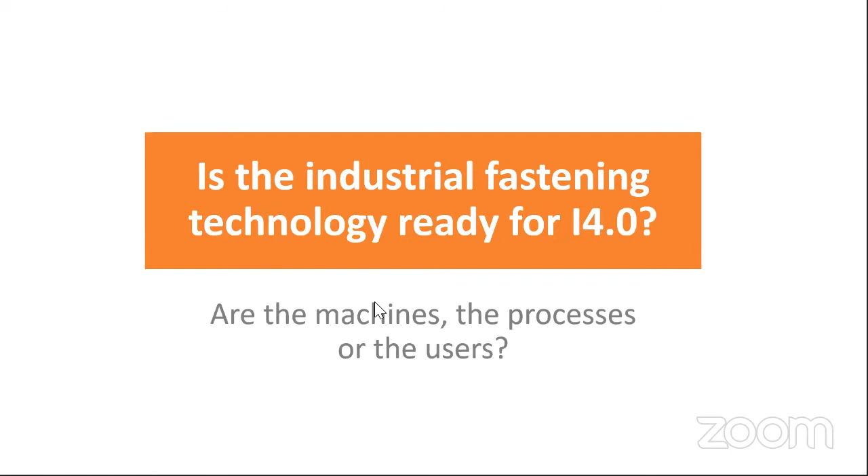I would like to start by asking you a question, and I would like you to take a few seconds to answer it for yourself. Is the industrial fastening technology ready for Industry 4.0? Because what I learned in the past and today as well, is that many people have many different views on Industry 4.0 and also on industrial fastening technique, and what belongs to that and what's not. There is also the question of, are the machines ready for the challenge or the opportunities? Are the processes in place? And are the users ready to go along and really leverage the possibilities here? I would like to answer that question and give you my view on that point.

By using a specific area of Industry 4.0, the expert systems, and tightening technology, depending on who you ask. There are people who really consider that in tightening technology, Industry 4.0 is already there. They use words like artificial intelligence. They don't even need expert systems anymore. Calculating joints is no issue at all. Machines can do that. The design is more or less automated, and also process control and so on. That depends, of course, on who wants to sell you which software, I have to say, or on which specific area those people are working.

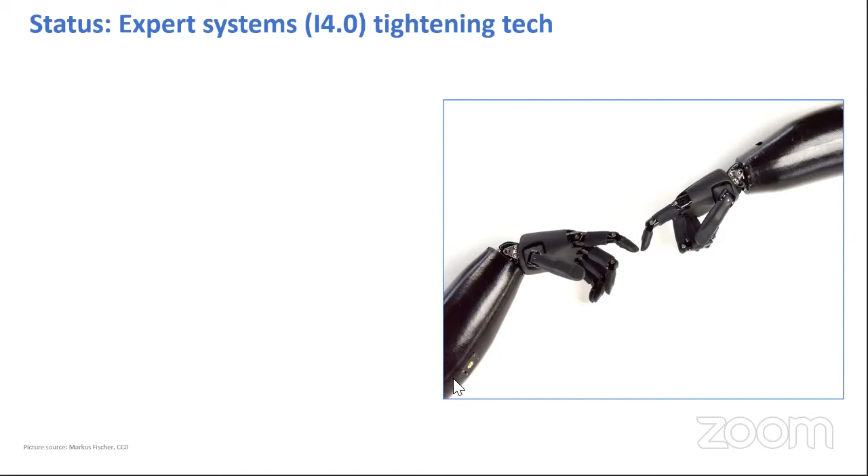On the other hand, you have a lot of people who have a good gut feeling still, and they see that tightening technology has been there for more than 2,000 years. We did it this way in the last 100 years, and we will do it like that in the next 200 years, and there is no issue.

There are challenges as well, and I think there's room for improvement there. I think we are very much in the middle. The current status is, depending where you're working and in which company, somewhere in between. And this in between is pretty a big void.

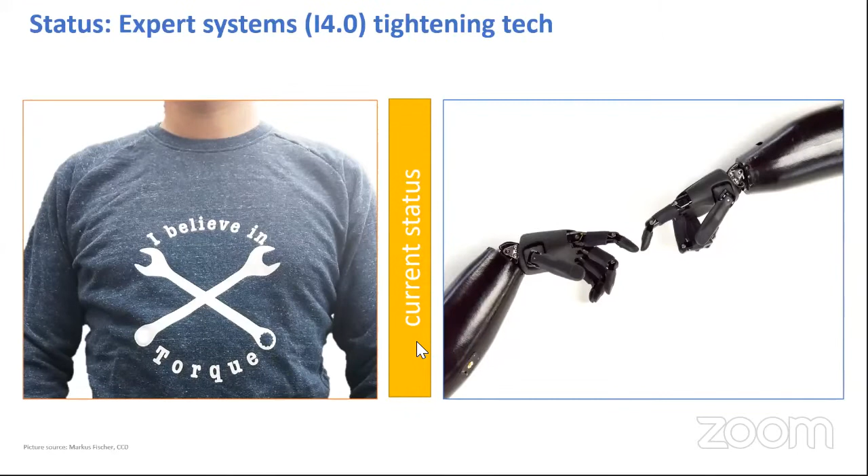I would like to give you an overview on the tightening technology by using a graph, which is pretty suitable from my perspective. The graph is a product safety pyramid. It starts from the minimum requirement, the product safety, which is globally and everywhere the same. This is a minimum requirement. And in the end, the green top, the proof, is of course necessary to show our customers and lawyers and so on that we did everything right.

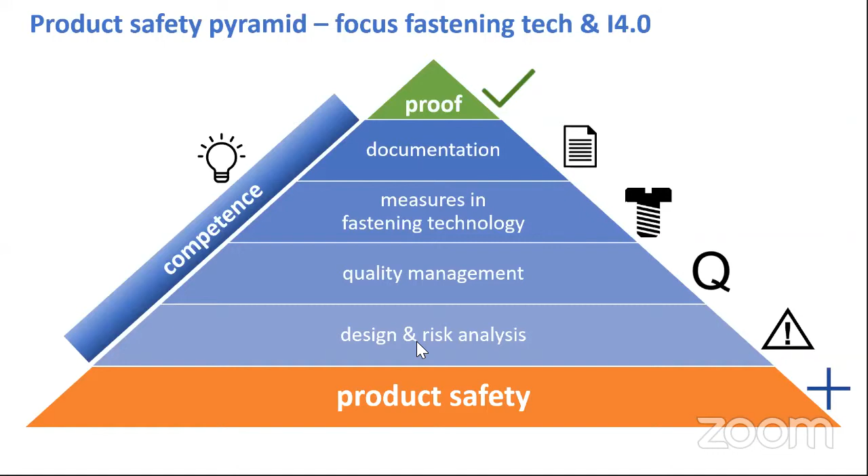But of course, in the middle, we need to maintain also the costs. We need to make sure that we are still capable to perform in a global market, and we need to make sure that our processes are getting streamlined and we are able to join our parts together. So this is where I want to guide you through and show the things in between, how it works with the VDI and also how Industry 4.0 is working out there.

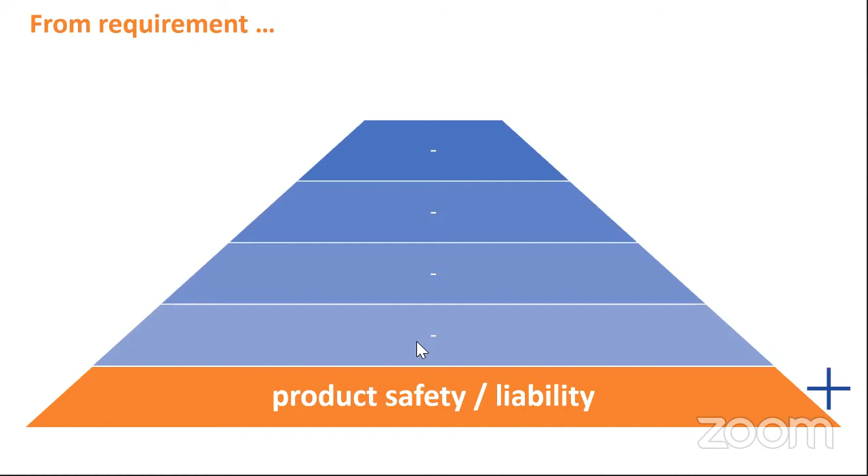As I said, product liability and safety is the basis of everything, no doubt about that. And we need the proof on top of that. And if we think about VDI standards, and that's something I get a lot if I have a webinar lately in Japan or in the United States, everybody is asking me, who cares about VDI in my country? I would say nobody.

But I beg to differ and disagree here, because there are several reasons why you should care about the VDI, because it's provenly best practice, especially with respect to fastening technology and the processes around that. And customers, of course, require allegiance with the VDI standards. And that's not only true for the OEM sector and the big automotive companies. The reason for that is not that they don't have too much money to spend, or they don't worry, but they know that from a technological point of view and from the economic point of view, the VDI standards are just best practice.

Another big point is that the VDI standards, since they are pretty much up to date, and we do a lot of revisions every year on several standards, it's a strong indicator for state of the art and science. And this is with respect to the product liability law, of course, very important. So if something bad happens and you are in the court of justice, everybody will check on the given standards. And since VDI standards are translated not just only in English, but several standards are also available in Mandarin and several other important languages, everybody can expect that you are up to date with those standards as well.

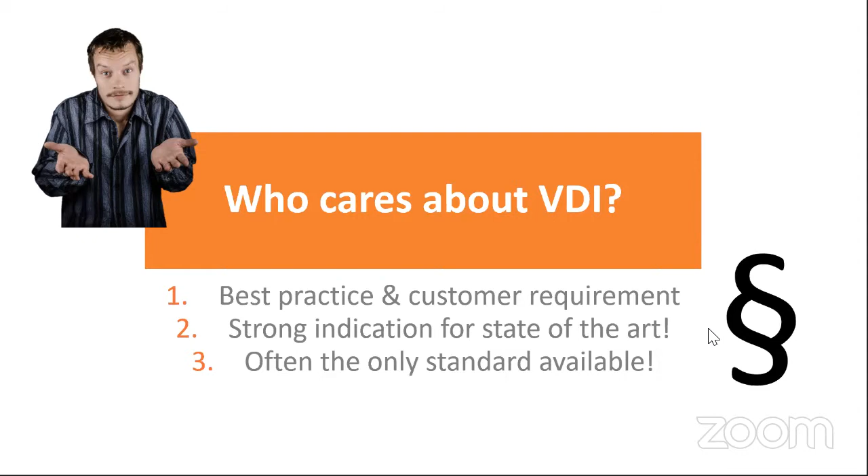And last but not least, and this I will show you in the next slides as well, sometimes the VDI is the only source to tackle challenges in your industry with respect to tightening technology. There is nothing else available. And therefore, you sometimes just have no choice but to cope with what the VDI is giving you. And the good thing about this is that everybody, private person and company, can join the VDI and help to make the standards better.

So to start with, there is a very well-renowned standard in the world from the VDI. That's the 2230-3 and 2230-1. It's a calculation of joints. It's just one screw you can calculate there. It's a 180-page document, and it's been in the market for several decades right now. And before I started to work in that group, they also published a part 2 on the finite element method for joint calculation for multi-bolt joints. And that was also very well received globally to be used as well.

What we learned in that time is that there is a great gap between the theoretical approach of many designers, bolt designers and engineers on the one hand, who are doing the calculations on how much torque you need to get the specific preload on your joint.

And the people who have to do it in real life, in their assembly line, and the people who are planning those assembly lines. And so we decided to support all of those.

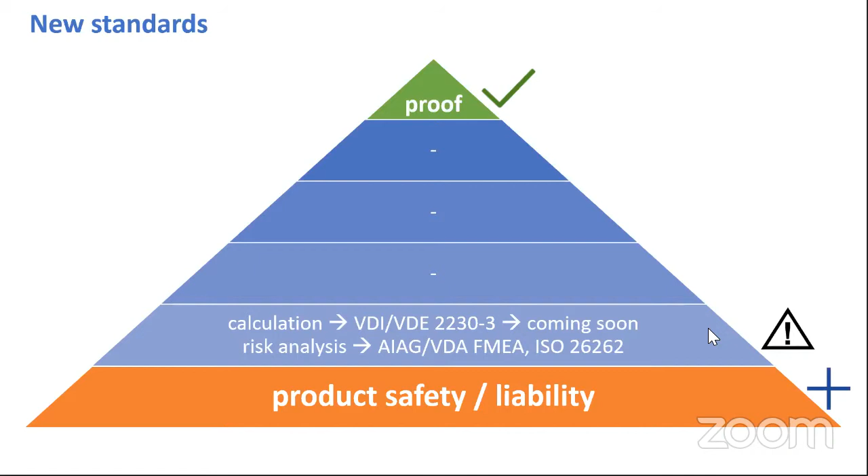And that's something we can see also in quality management. Since 2015, we have ISO 9001 in the current revision, and there you have that focus of risk awareness and how to tackle risks.

So this is, as you can see already, a red line moving upwards, that pyramid. And in addition, in 2016, the IATF followed through from the 9001.

And since I work a lot with companies which are in the phase of qualification for the IATF, I train a lot of those people as well, and also the auditors.

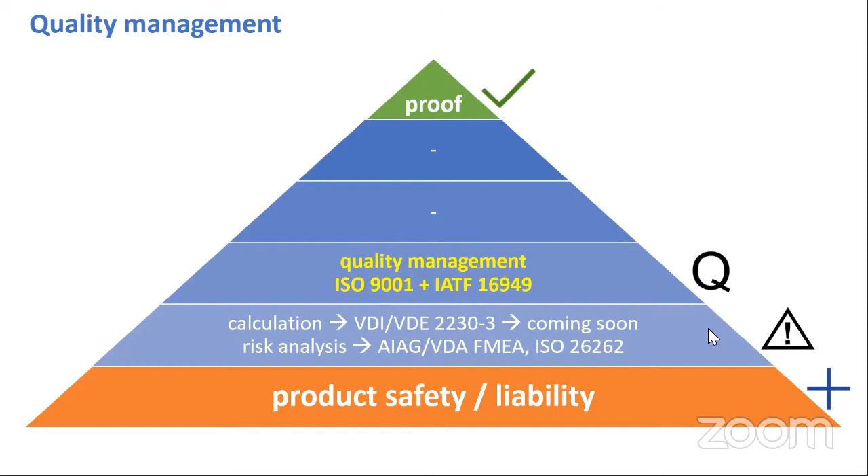And when I got the 2016 version in my hands, I was amazed how much you can transform into tightening technology, and how big the impact was on the tightening technology. And I would like to show you a little example of that.

Just some aspects from the IATF. So if you just choose some of the headlines from the IATF, there is almost everywhere a direct link to solve that issue or to tackle the requirements of the IATF with a VDI standard.

So sometimes you really have to work hard to find a solution with respect to fastening tech if you don't know that the VDI already did that for you. You don't have to reinvent the wheel, you just have to follow the stuff from the VDI.

I'm saying just, I'm a standards nerd. So I have friends still in the normal world, but I of course like standards.

But I can promise you, if you get into those standards and you discuss it with your colleagues or with experts, you learn that there is a lot to gain if you follow up on them and interpret it for yourself.

I would like to make that point on one specific area, error proofing. And error proofing on the basis of IATF can be done in fastening tech with the VDI VDE 2862-1.

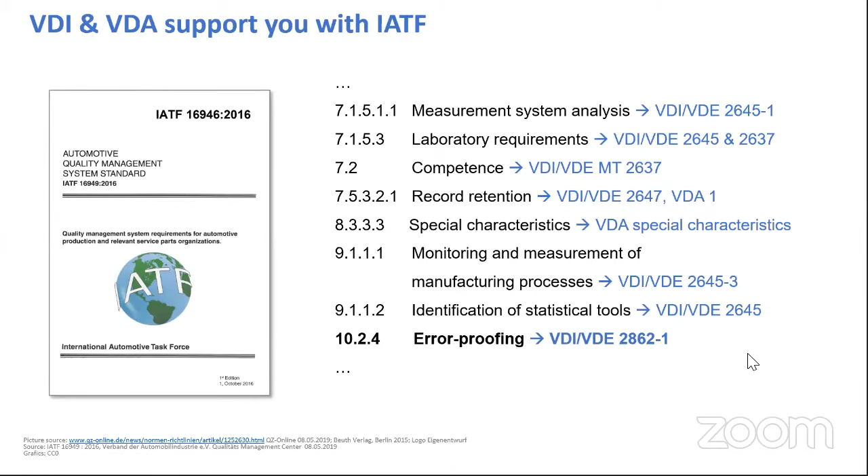That guideline is also very well known, because you might have heard, if you work for a German automotive company for example, that there is a categorization on the joints called A, B, C. A is for safety critical, B is for functional critical, and C is for uncritical joints.

So if you have done your risk analysis at the bottom of the pyramid, then you know where your products and your joints are safety critical.

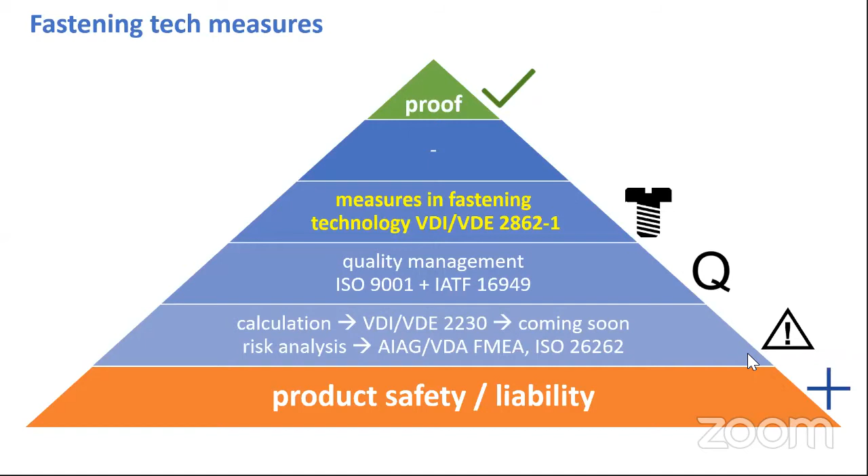In order to maintain safety and to ensure in an economic way that you can assemble those and have documentation in place, you can and should use 2862-1, because that standard helps you with respect to the requirements on the capability of machines, the process capability, and also the measurement equipment capability. They point to other VDIs, and they just support you if you have a functionally critical joint, on what your tools have to do and your processes have to look like.

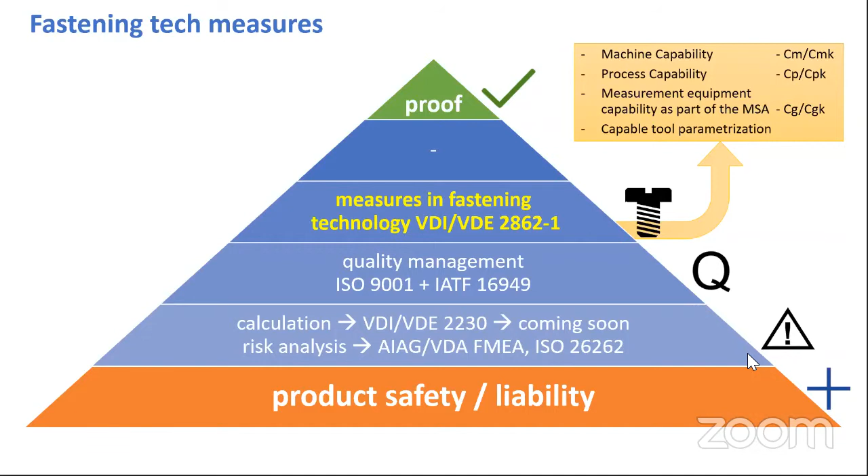And the last point in that line is the capable tool parameterization. I would like to show you what is meant by that, by the capable parameterization of a fastening tool.

You might recognize that from your daily business. If you have a torque angle trace and you want to tighten to a certain torque, then you usually monitor the angle, and that angle should be in a specific window together with a minimum and maximum torque. That's the green box, also called the Niner field.

This is something which is pretty old. It was in the business even before 2012, when the old 2862 highlighted that you need an assembly and a monitoring value.

And what was already there with respect to Industry 4.0 is that you can not just say that's an okay or a not-okay tightening, but you can also give the assembly line and the worker information on where you stopped. For example, if you had gone outside Window 7, and it's clearly a not-okay because the torque trace would be too steep, then you could figure out why this happened and give the worker the possibility to do rework. You could also automatically give the tool the right parameter set to do the repair work with, and give the line the information to put out the product for rework.

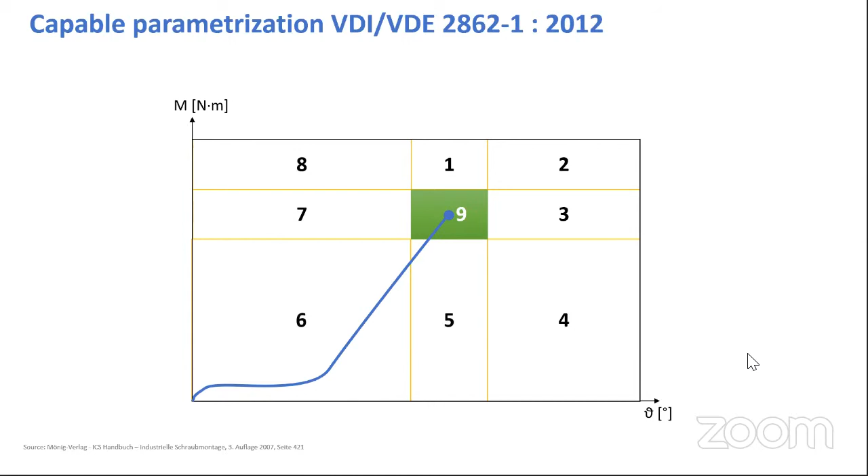So those were the first small steps, but to be honest, nowadays modern tools and systems can do much better. And in 2016, when the IATF came out, there was of course a request for more. Just picking out the error proofing aspect of the IATF.

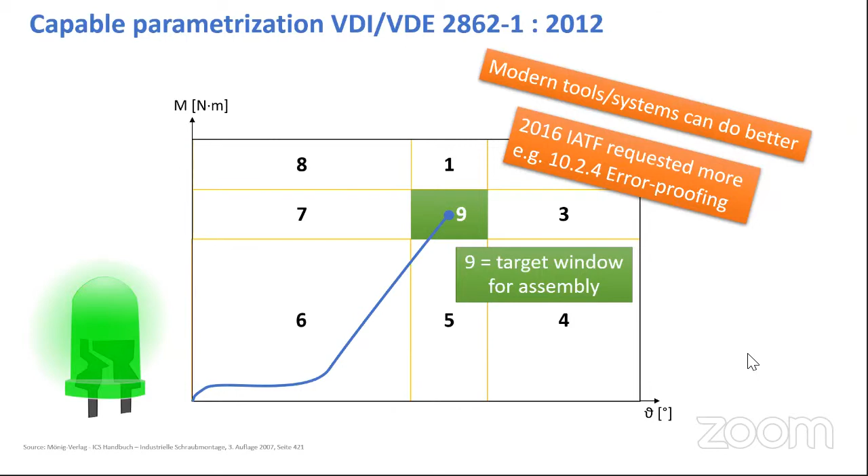If you look at a typical trace of a little bit more sophisticated tightening, for a self-tapping screw for example, you see a torque angle trace like that. And if you look at the little green window there, you see that there is a lot going on just before that. It would be a pity to lose the information we see beforehand.

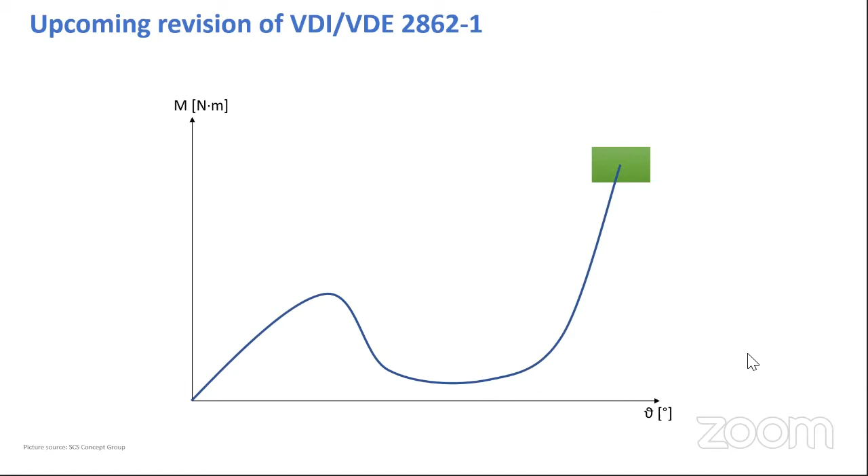To be honest, that green window is not all of it when it comes to ensuring the safety of your tightening. Because if you really cut the thread into your material, that happens way before the green window, and you need to make sure you measured what happens there regarding torque and angle, so you can see that this is okay. So a capable parameterization in the upcoming revision of the standard will mean that you have more monitoring.

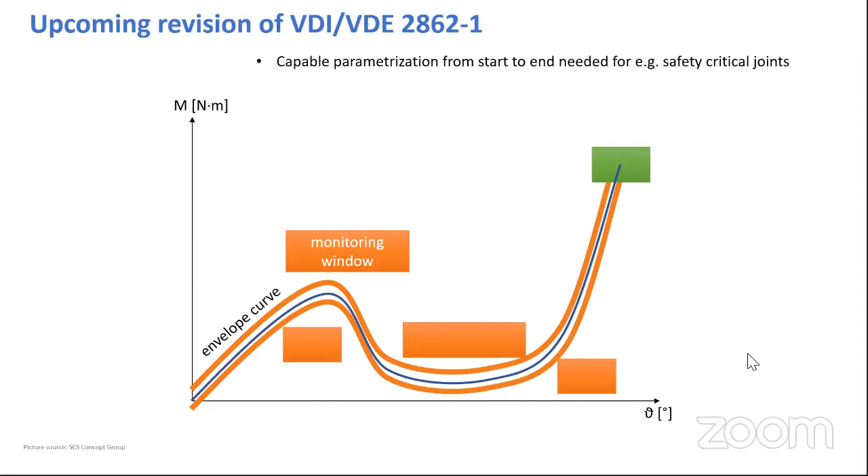Modern versions of that would have an envelope curve. You collect several hundred OK traces and evaluate them so far. So when the tightening is in process, the system is constantly checking against that envelope curve to see if the current trace is still within it, and can report immediately to the worker and stop the tightening before the material or the product is damaged.

This is also very important, but of course you need data analytics for that. And if we really want to use that to find errors during assembly, we need proof that it is really working. This has to be done before you establish that tool in the assembly line.

That means the IATF requires that you, for example, put in some products that are deliberately tampered with, bringing NOK products into the assembly system, and the assembly tool needs to detect them by itself and show a red light or an NOK. This is often not done, or not done to the extent needed. The reason for that is of course that it's a lot of work, but it's still needed.

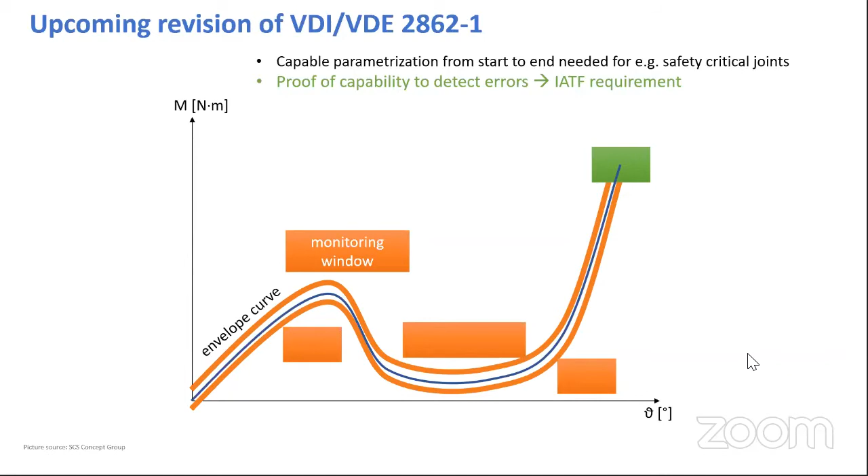Otherwise, you're flying blind. And the good thing is that VDI also supports that effort, requesting what is already required by product liability per se: that you prove your tool is not just okay because the tool manufacturer did a good job and the specifications of the tool are okay.

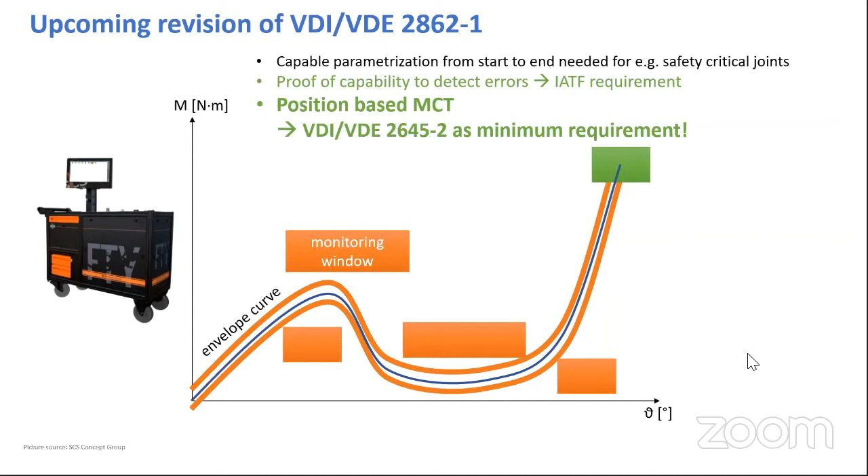But no, as a user of the tool, you have to prove that with your parameterization on your specific joint, you can get the quality you require. Therefore, you need to check the tool with the specific parameterization on the specific joint, and see how much is the scatter and whether the tool is really capable of covering not only torque, but also angle.

Something similar you have with process capability testing. This is also clearly a requirement from a product liability point of view, and from the point of view of VDI 2862, of course.

Process capability testing in tightening technology is pretty special, because in other joining technologies, it's always okay to just check the final product to see if the quality is okay or not. But with bolted joints, there's almost no efficient way to do that in a big assembly plant. You need a decent way to perform that, and this is usually a static torque testing or residual torque testing, described in VDI 2645-3.

But if you want to do that, and I will show you how it's done, you need to ensure you have a capable, parameterized tool before that. You have to have a stable assembly process, and a machine capability proof before you go to the PCT, because process capability testing is really the last line of defense. I would like to show you why that is the case.

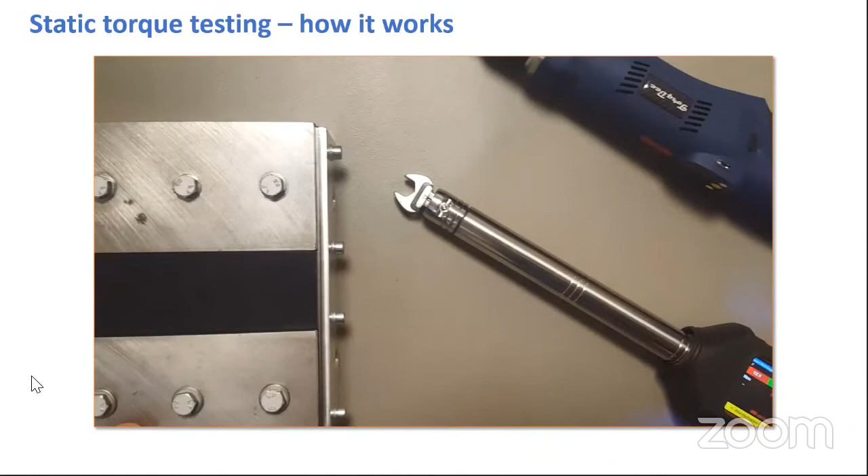A torque angle trace could look like that one. Usually they are a little bit different, but I can show you later. And this is what you get.

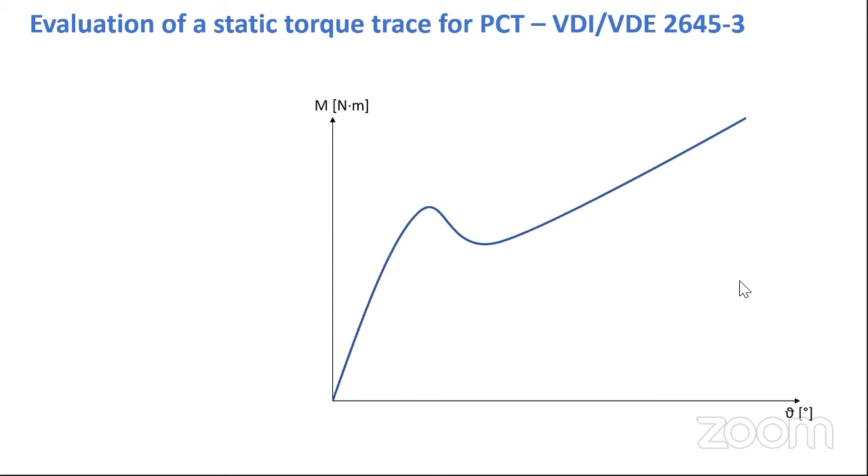The VDI, in that specific standard covering the PCT, says you can evaluate such a trace differently because every joint is different. If you get into that standard, you might get confused, because you can evaluate such a trace in very different ways. It's always a static torque measurement, but the results are drastically different, and this is confusing to people.

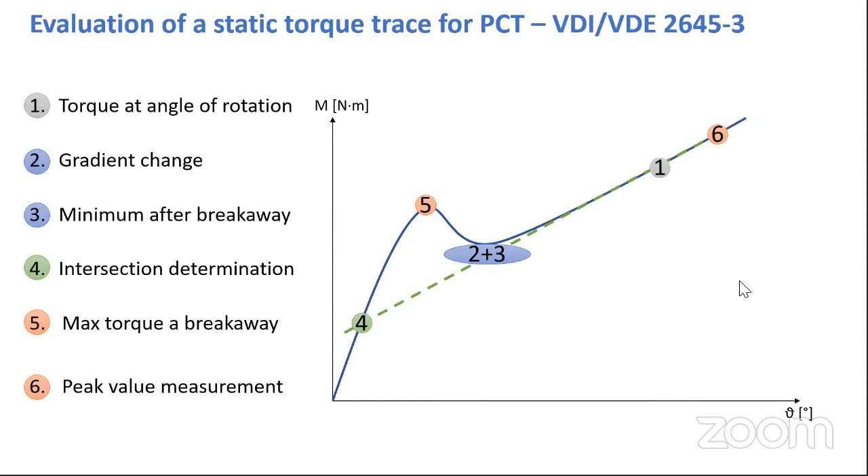If you buy a testing wrench from us or any other supplier in that area, you usually have 6 different methods of evaluation. Depending on which method you use, you can sometimes have plus or minus 20% different torque readings, and that's not easy. So most people are lost in space and don't know which point should be used.

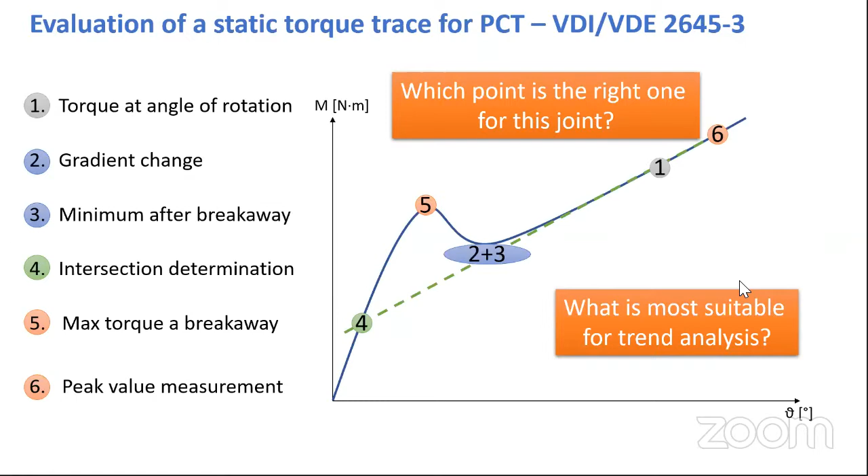That's also because many people don't really get the purpose of PCT in tightening technology. Usually it's just for trend analysis. It's not so much what you would do with joint analytics, where you really want to see the relaxation in the joint. It's about having stable torque readings over weeks, months, years of production, and seeing if something happens there, if readings go up or down. The trend is relevant there, not so much the specific value.

To make this easier for quality assurance personnel, companies in that area came up with some data analytics. For example, somebody took, in an early stage of assembly of a product, 10 or 20 traces of a stable assembled product. The software helps you decide which method gives the most stable result, and where the worker or test personnel has the least influence on the scatter of the result.

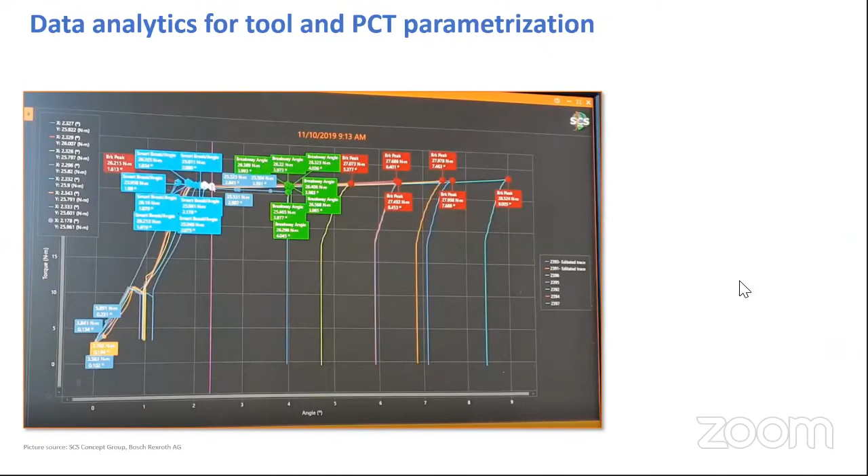Because if you do PCT by hand, you have, of course, some influence from the worker. That's also something where we see that we can compare the tightening data with the PCT data, and help quality assurance personnel decide if the data is valid and can be used, and with which method. Also, the VDI recognizes that in the past, many companies needed to use not just torque angle measuring wrenches, but also fixed angle spindles, which sometimes were even used for production, and then they want to use them as measurement equipment as well.

This is, of course, a big hassle, and IATF per se is not happy if you mix that. Nevertheless, we see, for example, on a marriage station, there's almost no other chance to get the testing done, if not by a specific tool or measurement spindle.

And what we did in the last two years, and I hope we finish our work on that in the next year, is we came up with 2645-1, which contains all the requirements on measurement equipment for machine capability and process capability. We also defined what somebody needs to do in order to use spindles and tightening tools for PCT testing as well. So this is really helping people who felt in the past really in a gray zone with their testing, but thought it was better than nothing. This is really helping them, backing them up and supporting them with real data and standards for that.

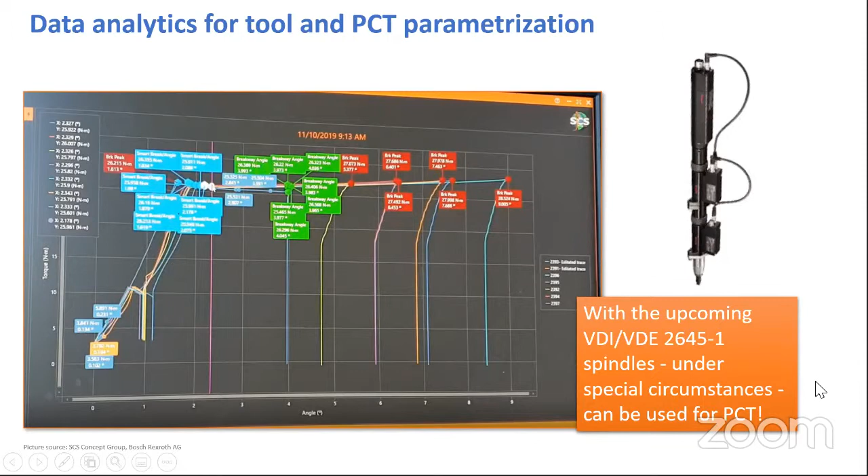If we talk about testing, and if we talk about IATF or ISO 9001, you always need to prove your processes with statistic methods. Usually all those international standards require that you make sure that your processes are correct on basis of ISO 22514. There are several parts of that, of course. And the problem for most people is that there's a big gap between your practical assembly work, your quality assurance with bolts and nuts, and the statistical demands. This is a huge hassle. If you want to follow IATF on the 22514, which is one of the required standards in the back of the IATF, then this is quite a task, to be honest.

So VDI was challenged for that as well. And that's the reason why, if you look at the 2645 series - parts 1, 2, and 3 for machine capability, process capability, and measurement equipment capability - we were able to really take care of those requirements from the ISO and transform them into a practical approach for tightening technology.

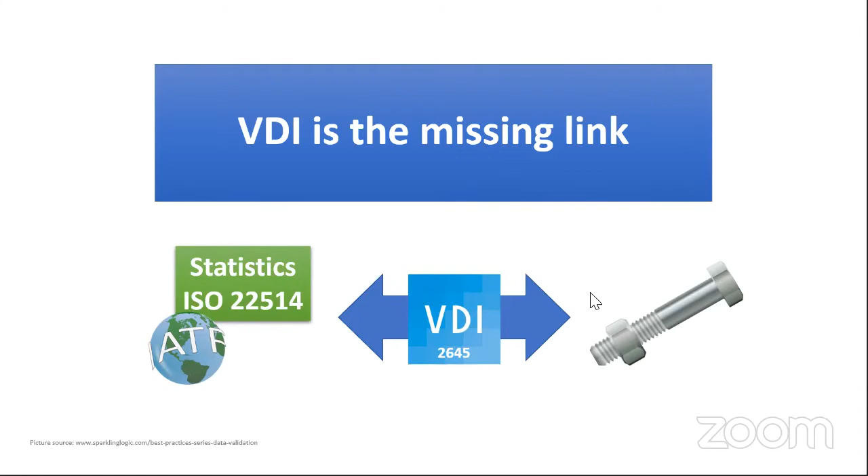And this is often not really precisely defined in a job description. Nevertheless, lawyers would point out that you should know that this is your responsibility as well. So sometimes that's interesting to read and to help the company get better.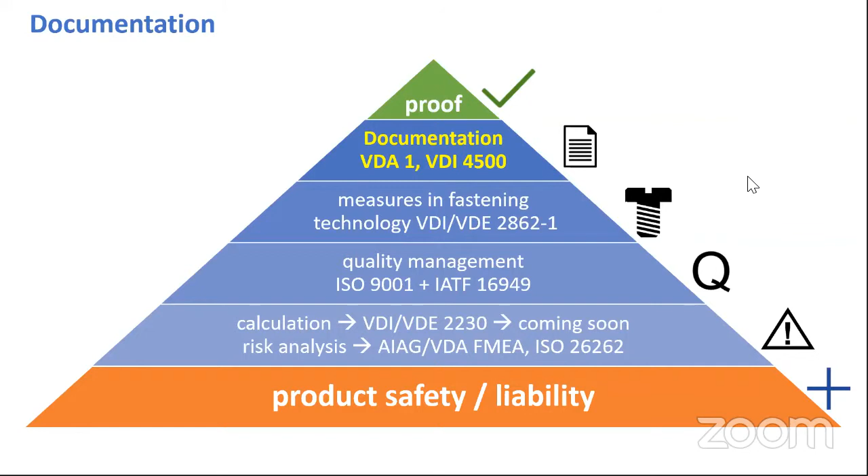Nevertheless, I would like to just highlight the VDA 1 in one perspective, which is quite special. What you can see is on the left side, the 3rd edition, and on the right side, the 4th edition. And if you read the small printed stuff in the beginning of those standards, it's clearly highlighted that even though there is a 4th edition, it doesn't mean the 3rd edition can be tossed away. The reason is that all those editions have a different focus area, so it's important not to forget the old versions and make sure you've covered those as well.

For example, the 3rd edition takes care of software and hardware requirements regarding archives, what is the needed IT infrastructure, and something like that. But the VDA also points towards the 2862 with respect to what needs to be checked, how it has to be documented, how people need to be qualified, and such stuff. And what I found very important in the 4th edition was something like the documentation for machine capability testing, also for our fastening tools, and the process capability testing.

The documentation for machine capability testing, also for our fastening tools, and the process capability testing - the archivation time is 30 years.

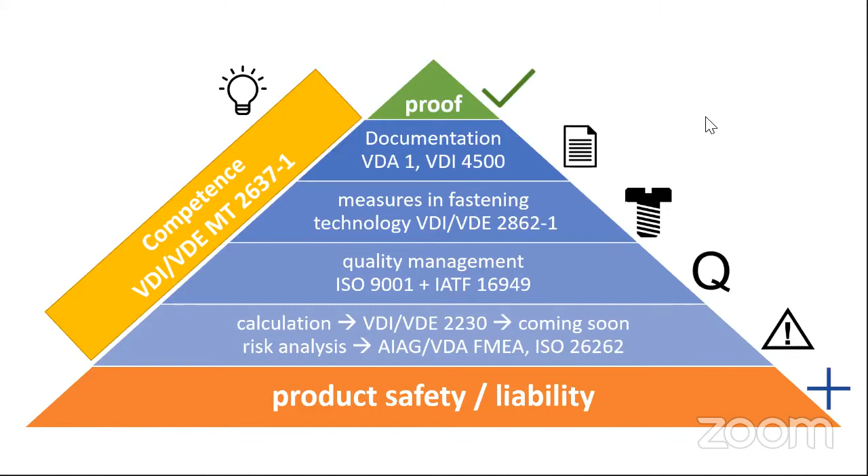So yeah, that's our little pyramid. But we have one thing left to go, and that's competence. Because if you check on product liability, if you look at any of those standards we see here in the pyramid, there's always the requirement that only qualified personnel can be used for the specific tasks.

And that's pretty ominous, or was at least in the past, because there were no standards really helping you on what that means. If you are a welder, then you know if you have a safety critical weld, you need to pass practical and theoretical tests every 6 months or something like that. Otherwise, you are not entitled to do that. The same for people who are calculating welds. And even for gluing, there is a European engineer title for that.

And in the past, there was nothing like that in tightening technology. The German Fastener Association started with a fastener engineer program, where I am now a tutor as well, a lecturer for machine capability and PCT. The possibility to study that has now been there for 7 years, but of course the DSV is not big enough, and it was not structured well enough.

So the DSV and the VDI joined forces, and we were able to bring up that standard, the 2637-1, within less than 2 years. And it's really helping everybody understand what their current job is, what their responsibility is, what they need to know, and how they have to prove it in the end.

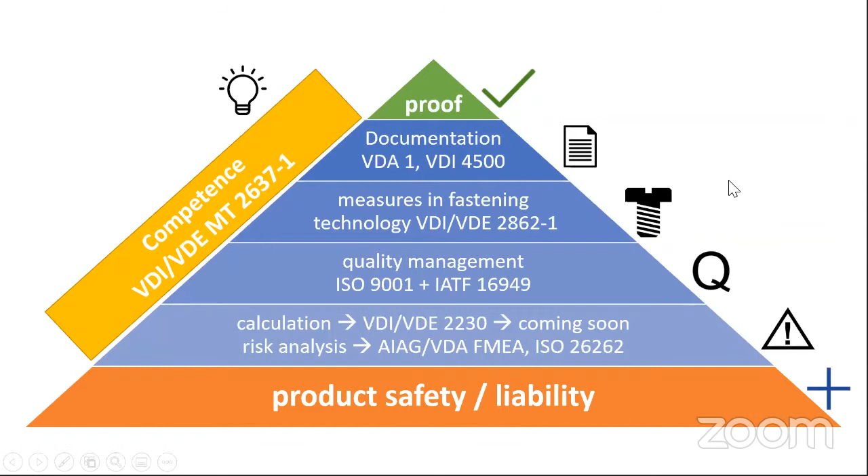This is absolutely a must read for everybody in the tightening business. It's not just for people who parameterize tools, but also for people who buy bolts and nuts, people who buy software even are mentioned there, and also, of course, management, and what they have to prove as competence in that field of expertise.

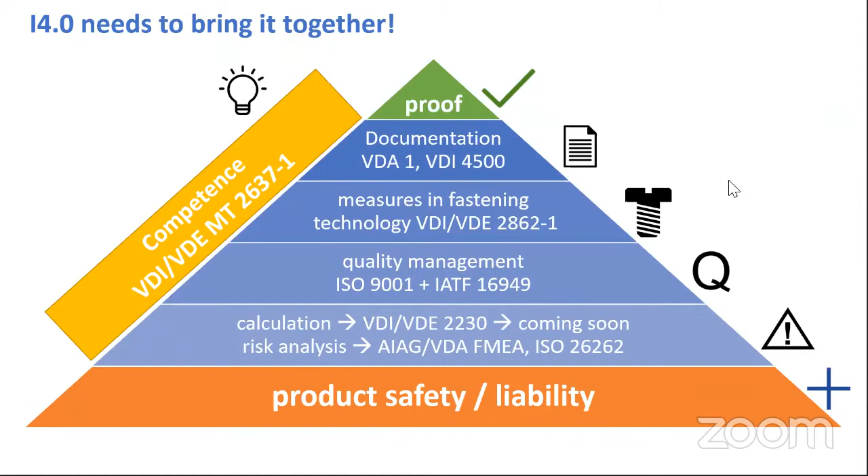And since this is such a huge pyramid, Industry 4.0 needs to bring that together, so the data is not lost from the beginning to the end, and the other way around, to make sure that the competences are in place and the systems recognize a competent person or help train people as well. There are good things which we can already see and which are already possible, and I would like to show you a little bit of that.

For example, if you determine the assembly parameters at the beginning of a project, then you can already document that in specific software. That software can also collect pictures, drawings, or whatever is needed maybe later for worker guidance.

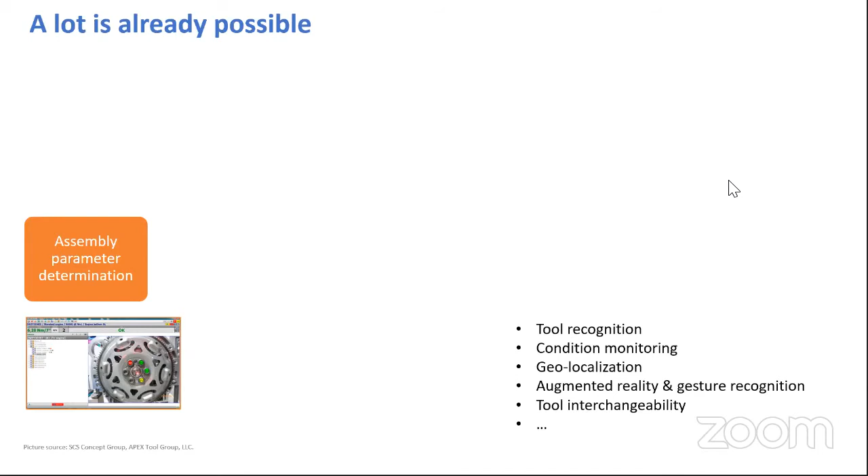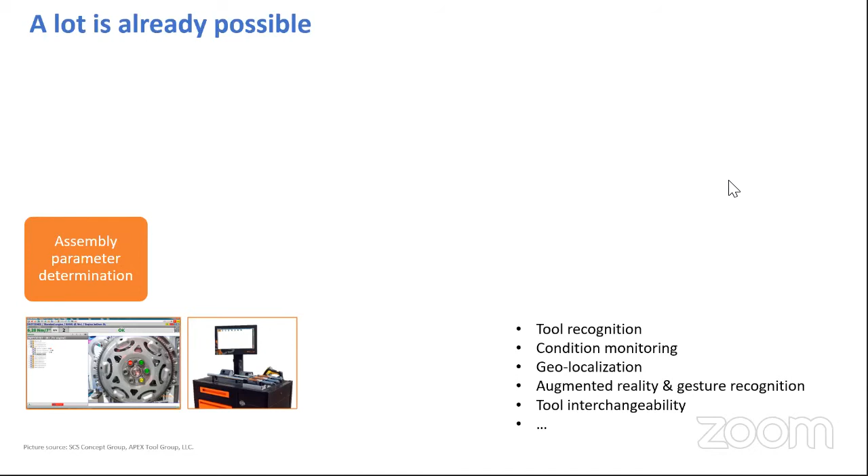But also what we can do is use, for example, hand-operated wrenches to check on prototypes to see if the calculated assembly values and target values are okay for that product. That's also true if you go into joint analytics afterwards, if you really want to destroy parts, destroy the joint, if you want to find out what the right PCT target value is—this can be collected in such software as well.

And interestingly, and this is a huge step forward, if you then have the parameters for those wrenches for the assembly, it's possible nowadays to really give tools, power tools from a different company, those parameters by just a mouse click, and the tools have at least the basic parameterization already in place.

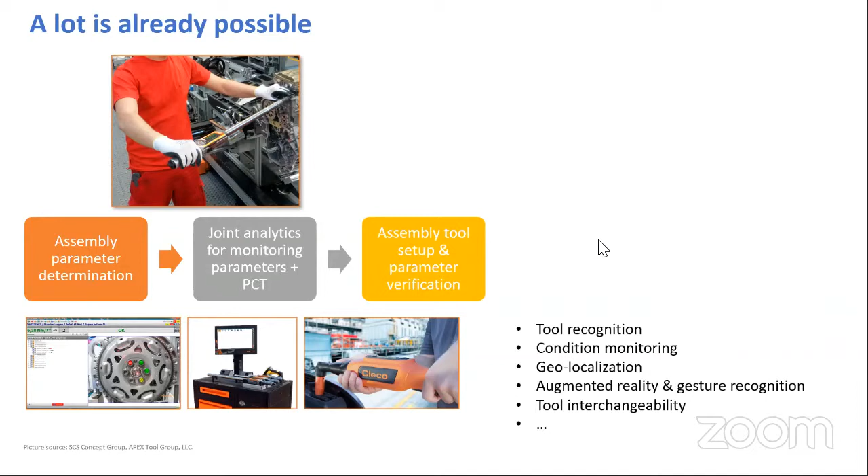And you can go then and also do verification of the parameters with respect to whether the error proofing is okay. You can do that by sending, from the early analytics, where you collected torque angle traces, those traces to joint simulator benches by a mouse click. You send it to them wirelessly, and then they simulate the expected joint, and then you can check your power tool to see if it's capable for that. You get a CMK value, of course.

And so you can also use the pictures and the data you collected in the early phase to ramp up fast worker guidance and other process quality assurance methods.

If you later want to test your tool, it's no problem nowadays that a testing device like a joint simulator bench recognizes immediately if somebody approaches it with a tool. The system then collects and selects the needed parameters, parameterizes the bench and the simulation, and gives the okay for the user to use the tool, or makes sure the tool cannot be used until it's repaired.

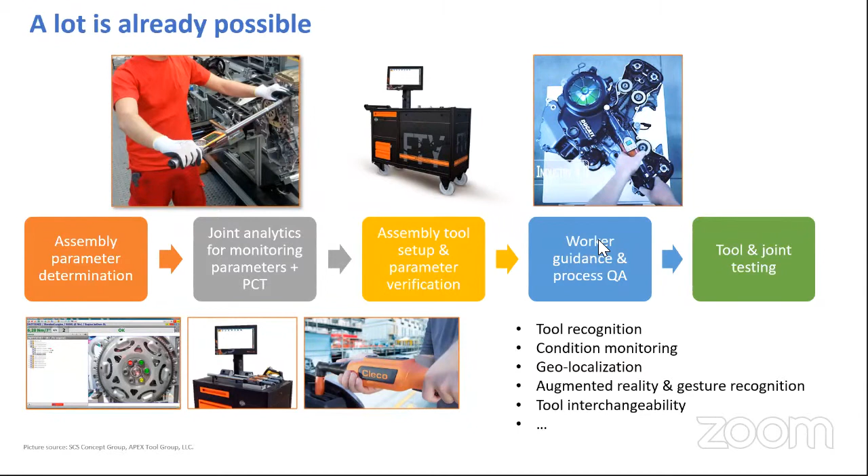So we have a lot of stuff already going on in that perspective in tightening technology, but of course what's needed is a data exchange standard which has a global approach, to make sure tool interchangeability is better.

There are several approaches. MQTT, for example, is something I'd like to mention, but I'd like to highlight here the effort from OPC UA together with the VDMA. They came up with the Open Platform Communication Unified Architecture for end-of-arm tooling in the industrial joining technologies. That's quite a topic, or name, for a work group, I have to admit.

Their goal is really to make sure that through that standard, you can just take a green tool and exchange it for a blue tool from a different manufacturer, and it's instantly working. And this, of course, is quite a challenge.

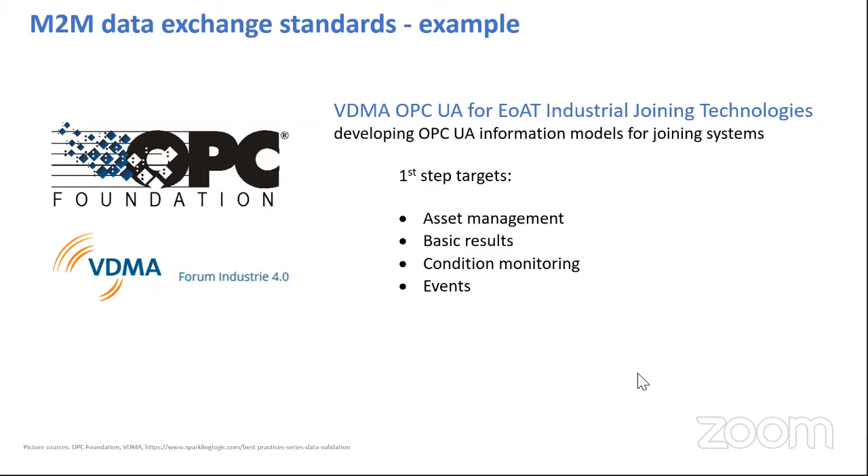That's the reason the work group set their targets a little lower. The first step targets are, for example, asset management, tooling, measurement equipment, and so on—getting basic results from the tools and measurement equipment, also traces, condition monitoring and events.

So they have a tight schedule. They meet a lot, and almost every important tool manufacturer is on board. But still, they have a lot of trouble getting that thing going, and one of the reasons is a pretty boring one, I have to admit.

The terminology is not aligned. Let me give you an example: if you want to say that a specific point on the torque-angle trace is where the angle gets measured, the torque value where the angle gets measured, there are several terms for that—it might be angle threshold, angle triggered torque, angle starting point.

So if you want to use IT infrastructure, and every tool manufacturer, every assembly company, every OEM uses different terms for that, then you might have the most sophisticated software in place, but the data will get mixed up and results will be messy.

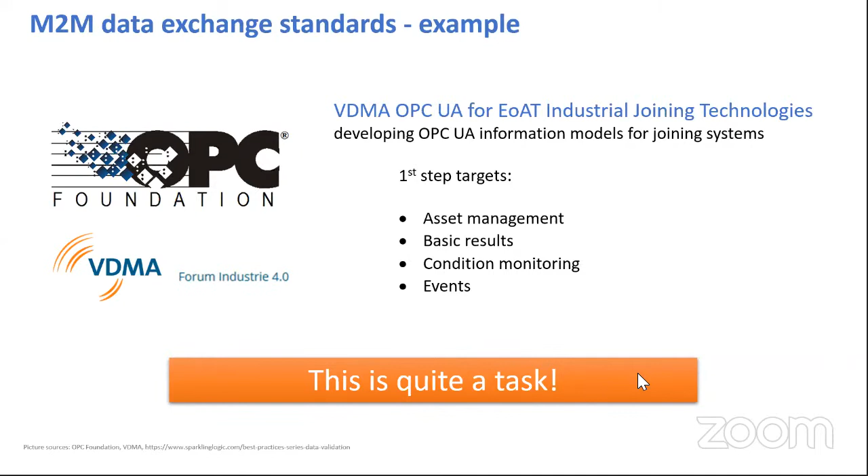So VDI said we'll take care of that big task as well, and we've spent more than two years now building up a glossary on that. We're hopeful to publish that on the VDI homepage in the next month, at least a first version, and we'll build up on that. It will be in German and in English, of course.

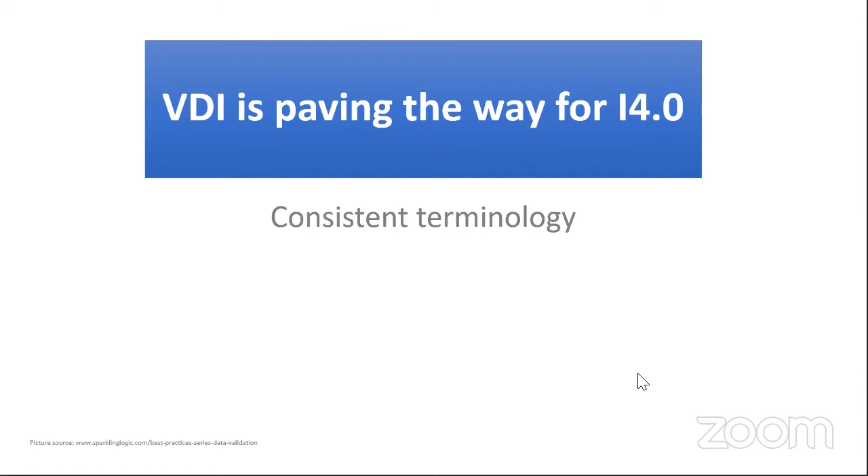We also want to give descriptions of what is meant by each term, so every tool manufacturer, every company who wants to build up an Industry 4.0 structure and gather data can use those descriptions and terminologies. Then, of course, for the user interface, they can do different labeling, but at least the structure, the backbone behind it, is working well, and the data can be used.

The VDI is also paving the way regarding qualified personnel. In Germany, at least, we have more and more academies helping companies get their people qualified in a decent way. We're not talking about hundreds of thousands of hours people need to spend to be trained, because we already have good people, but I'm pretty sure we can streamline that effort which is already being done.

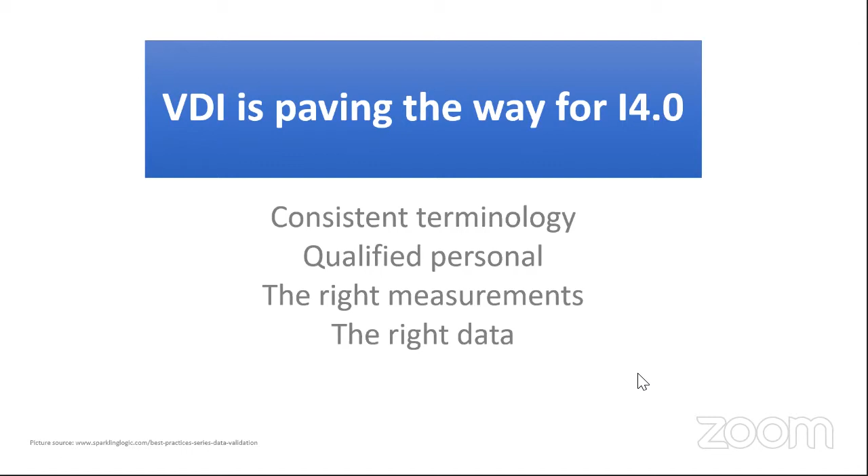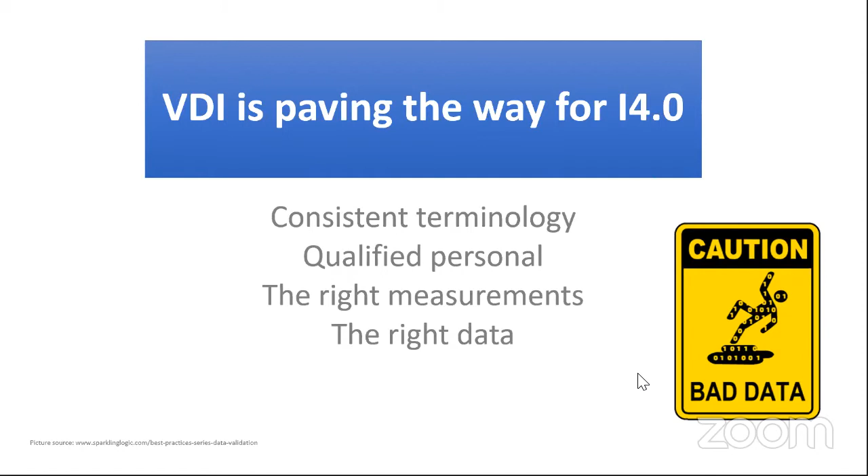And then, of course, we make sure that we measure the right stuff and have the right data, because what's important is that we don't want bad data. If your server rooms are full and you're wasting money on servers, just swimming in data lakes and not getting anything out of it, then why do it in the first place? Then Industry 4.0 is lost.

That's my vision for the expert systems of tomorrow. I really see that we still need humans for that—good, qualified personnel—and then bring that together with hardware and software capable of really connecting the dots together with the experts. Then we have a good future for this technology with the bolts and the screws.

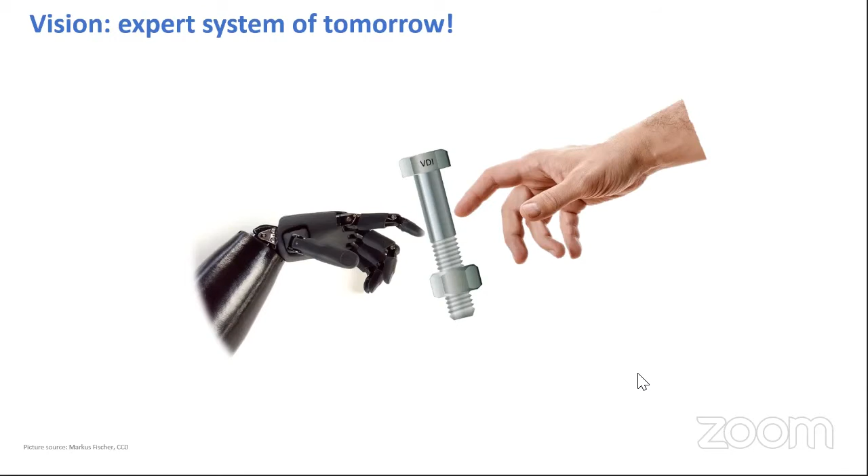So I say thank you very much. I hope that was sort of interesting for you. And now I'm pretty happy to answer your questions.

Thank you very much, Markus. It was very enlightening and a very good overview. In the end, I think we could really see the link to Industry 4.0 and to one basic element that we have been discussing in a lot of different sub-areas in the industry: we still need human beings in the process who really know the cause-effect relations of what the electronic or digital systems have to deal with. This is really an important point for us here in Brazil to follow up on.

We have two questions so far via our Q&A tool. The first one is from Emerson: which VDA standard has a role for product safety that is commonly used in R&D? That's probably a broad question in this context, but maybe you could refer to the most relevant VDA standards for fastening technology in this context.